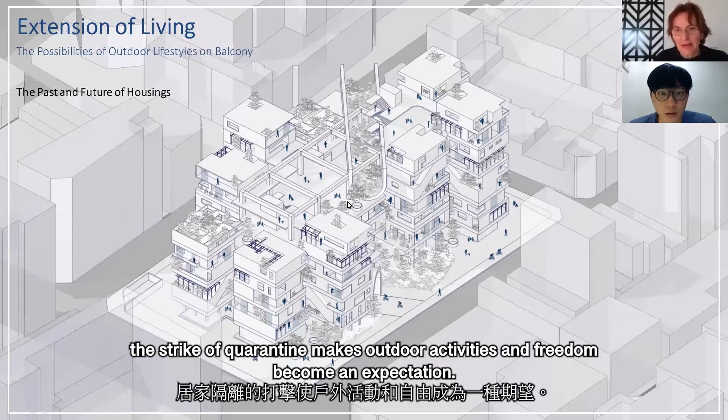What kind of life form is in line with the lifestyle of people? When societies face a dramatic change in the environment, the strike of quarantines makes outdoor activities and freedom become an expectation.

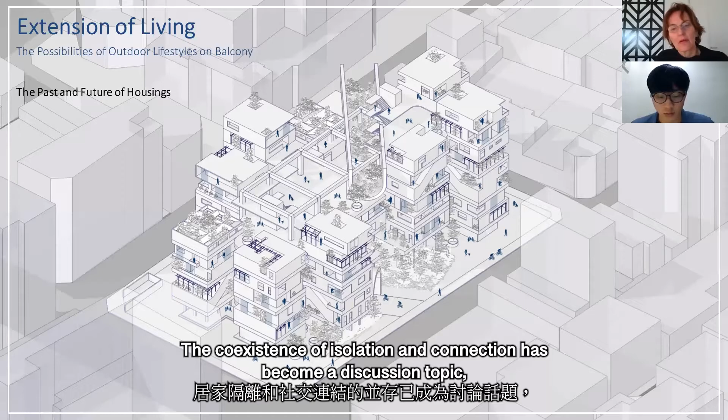The safety and independence of personal spaces are re-examined. The coexistence of isolation and connection has become the discussion topic, and the flexibility and resilience of housing are getting essential. With verticalization and densification of residents, the distance between residents is getting closer. However, the interaction is reduced in comparison.

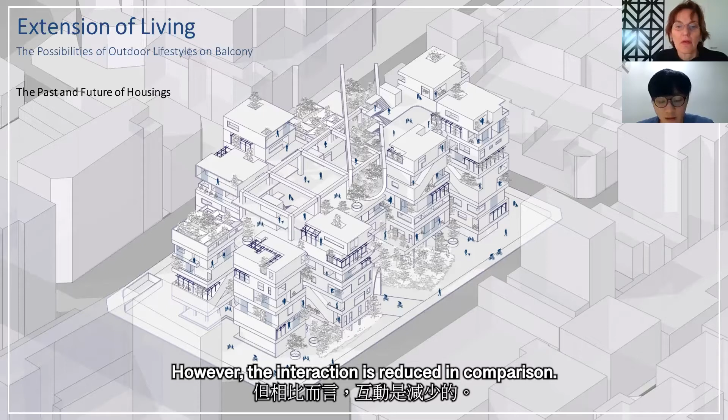The outdoor space that used to belong to humans is ignored. In the subtropical climate, there is plenty of sunshine and high temperature, and rainy weather. Therefore, semi-outdoor space can provide more shelter and a good environment for use.

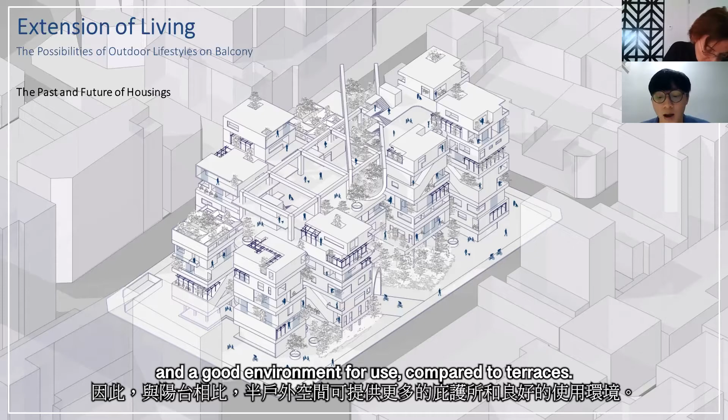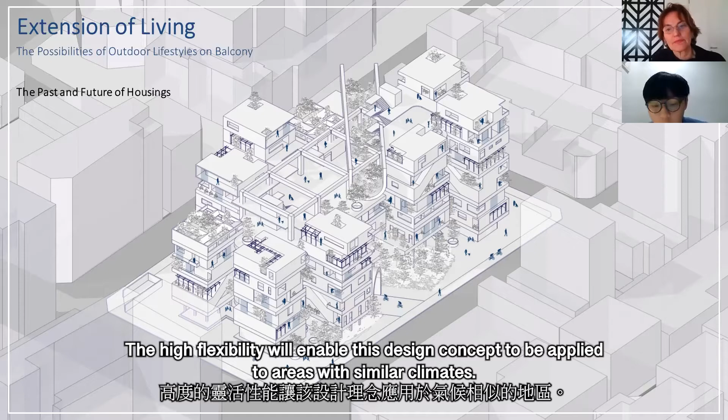The high flexibility will enable this design concept to be applied to areas with similar climates. Under the same system, the building can be adjusted according to different cultures and habits.

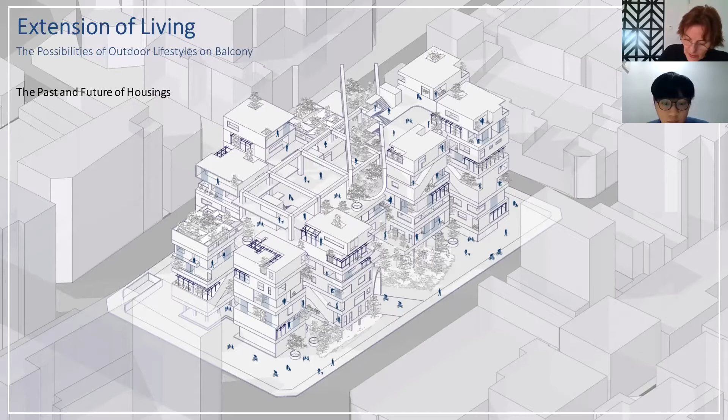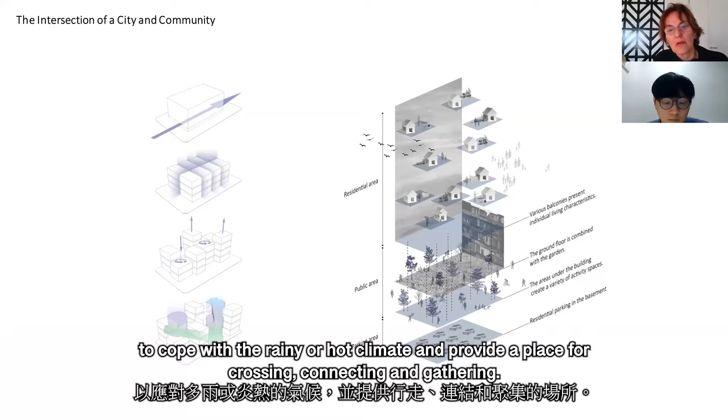The entity of buildings is raised to create enough shelter on the ground level to cope with the rainy or hot climate, and provide a place for crossing, connecting, and gathering. The ground enters the community.

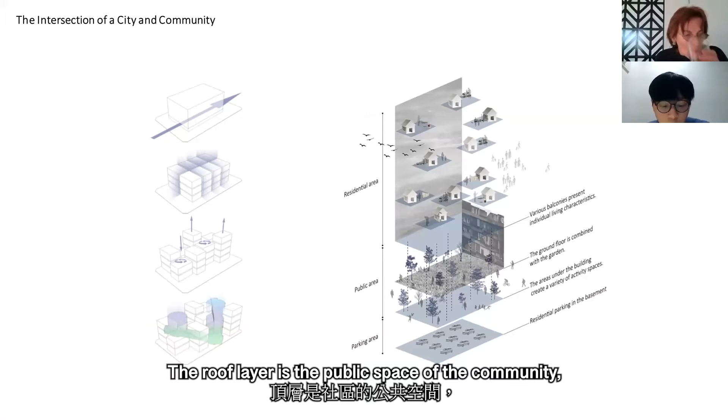The community is no longer a closed field. The roof layer is a public space of the community, providing residents with a variety of outdoor and indoor activities, as well as an interactive area.

Even in a state of cutting off from the outside world, the resident can still enjoy a safe public space.

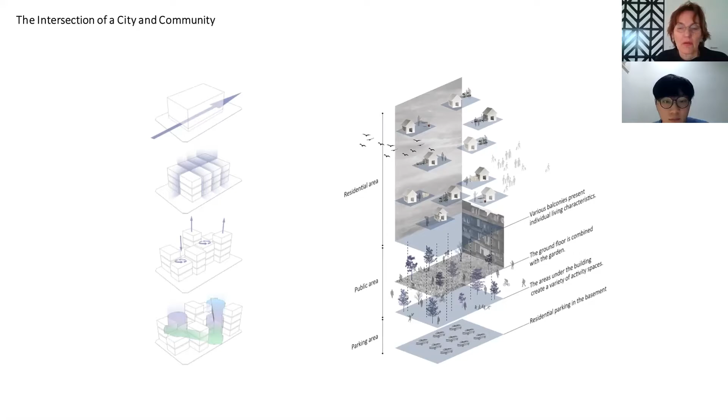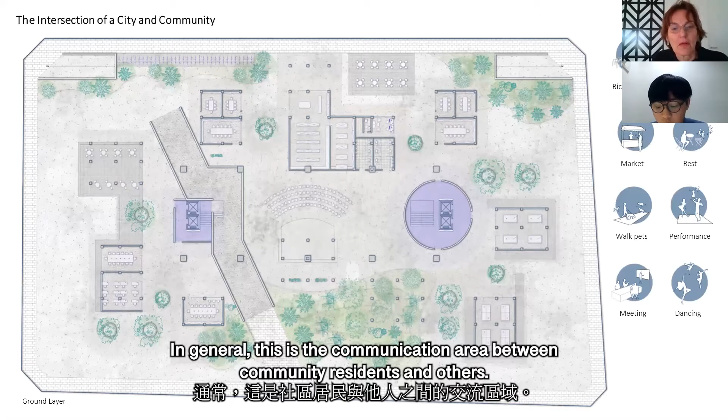The public room units are located on the ground level without a wall of the community. In general, it is a communication area between community residents and others.

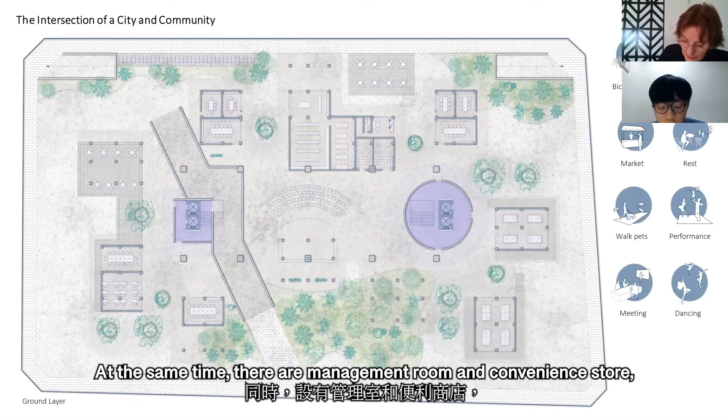At the same time, there are management rooms and convenience store stations, during a temporary period, as a way to filter community residents and people who are not living here.

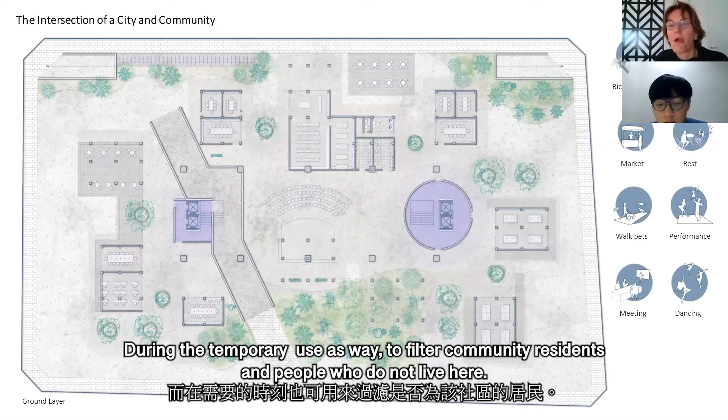Let's move on to the dynamic boundary. Inside and outside are related ideas.

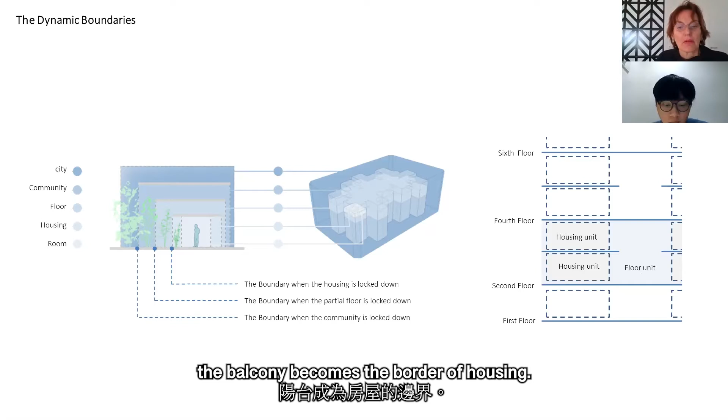When the community is in lockdown, community housing becomes the border of the resident living area. When individual housing is locked down, the balcony becomes the border of housing. In different extents of lockdown, the relation between inside and outside will shift dynamically.

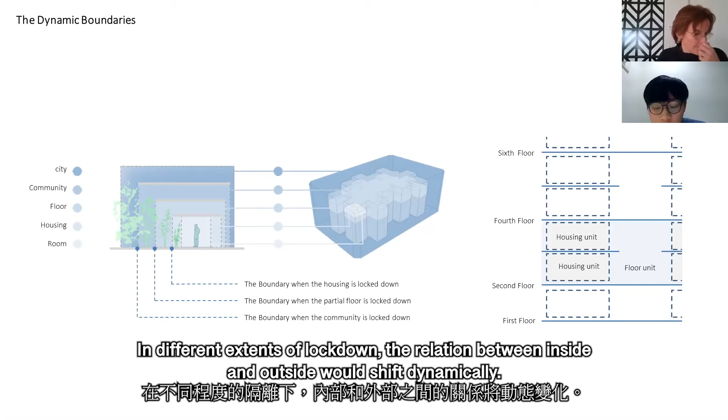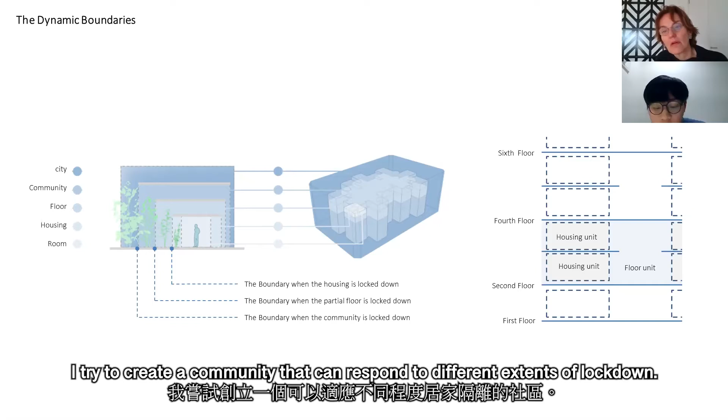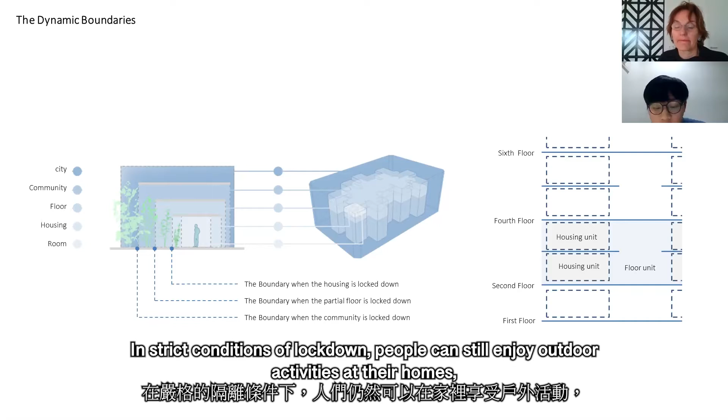In this case, I will define the border from room to environment. I try to create a community that can respond to different extents of lockdown. In strict conditions of lockdown, people can still enjoy an outdoor active living place.

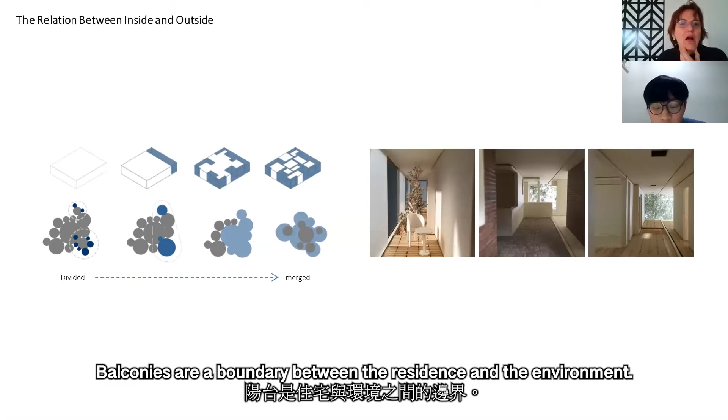Balconies are the boundary between the residence and the environment. It is a transition often ignored. When people have to stay at home longer than before, balconies that are easily overlooked will be emphasized and become the most abundant living place.

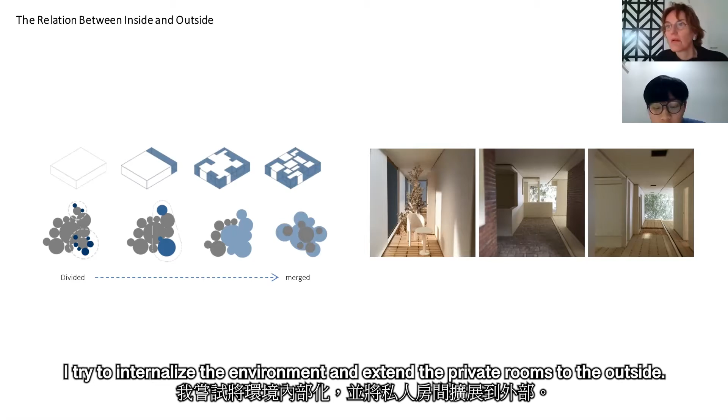I try to internalize the environment and extend the private room to the outside. The coexistence of various life events and environment occurs between inside and outside. Residents can feel the breeze, drizzle, sunshine, and greenery, and this creates more possibility for life.

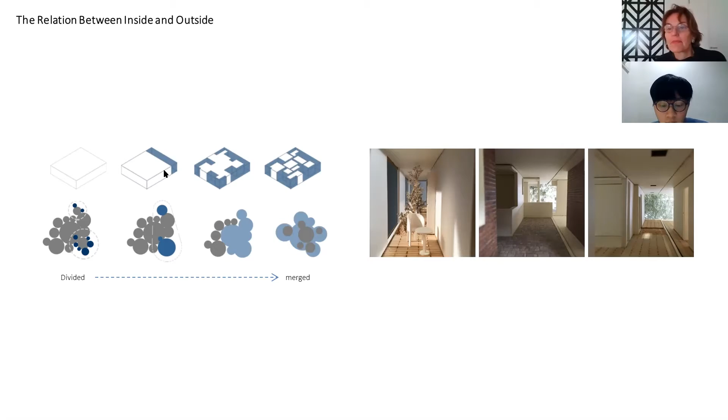Will you be able to imagine how people use semi-outdoor space when the balcony is not just a balcony? Abundant appearances of houses are built by users so that the building will change dynamically like a life.

Essential and basic functions are set in the original plan in order to provide residents an opportunity to alter flexibly in the future. The flexible area is the benefit to change of living concept, increase or decrease of family members, and individual needs. I propose the possibility that all daily events are combined with the outdoors.

Even provide space such as the bathroom, toilet, and dressing room. By using different interfaces, I create a private outdoor environment that allows us to feel the outdoors in our daily life. The original plans will develop into different appearances after resident lifestyle is added.

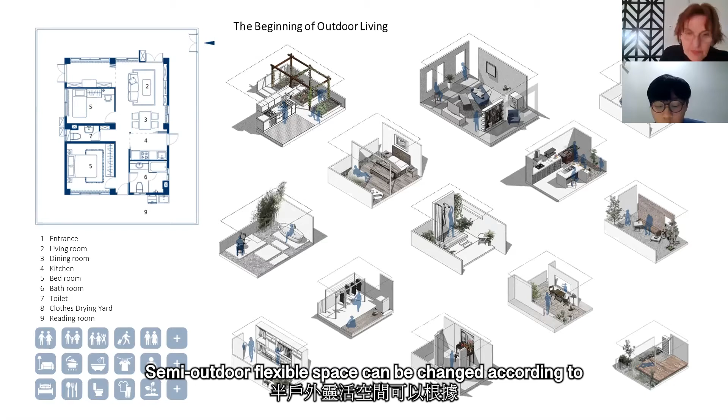Semi-outdoor flexible space can be changed according to different needs or lifestyle of each house owner. I make the balcony like a core.

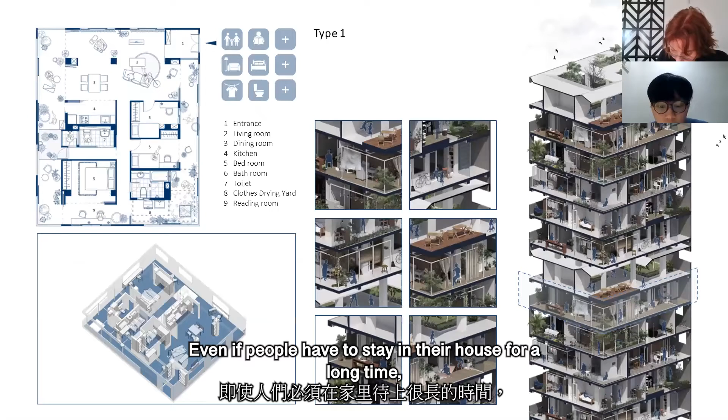I would like to expand on how people live with the outdoor. Even if people have to stay in their home for a long time, their life is still unique and diverse. Based on different settings of residence, I explore the possibilities of living for people, developed into 4 types.

Look at the plan. The slide door and folding door freely allocate the size and openings of each space so that the rooms can be a part of the balcony, and the outdoor becomes a part of the room.

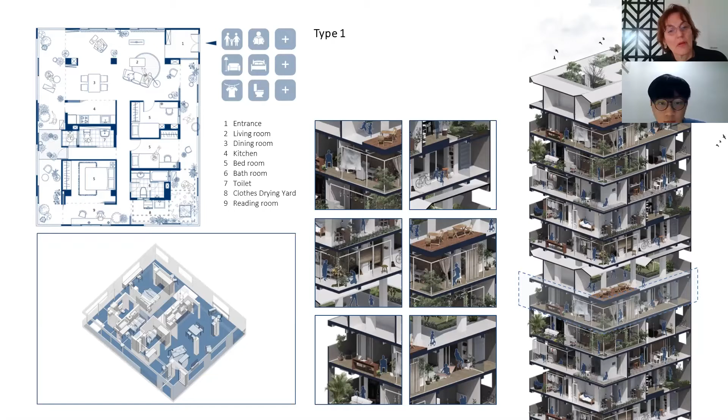Moving on to type 2. People can even create a courtyard at home, laid on the wooden floor garden.

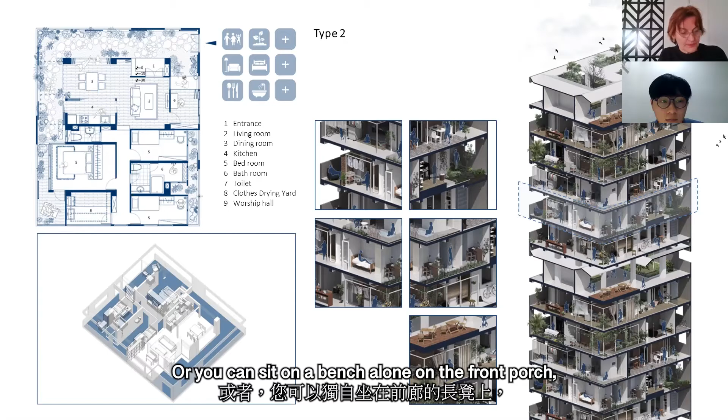You can hear the sounds of breeze and plants by opening the French window next to your bed. Or you can sit on a bench alone on the front porch, reading a book with a cup of coffee, invite friends to have dinner on the balcony, and watch the sunshine fall in the water.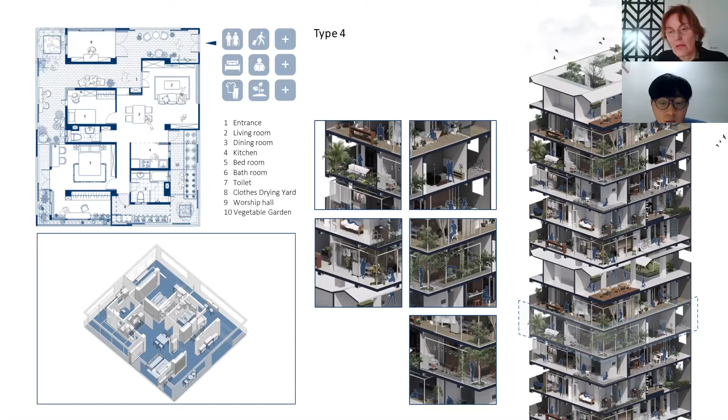There is a window in the corner of the room, facing the trees on the balcony. From the gap in the dressing room, you can see the view of the city. The balcony outside the kitchen becomes a garden for growing vegetables and fruits.

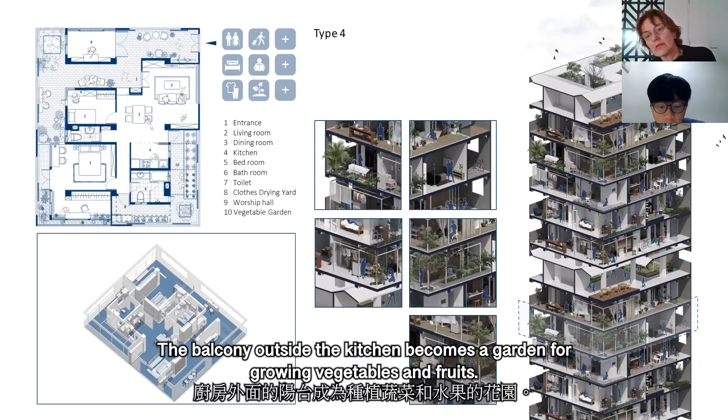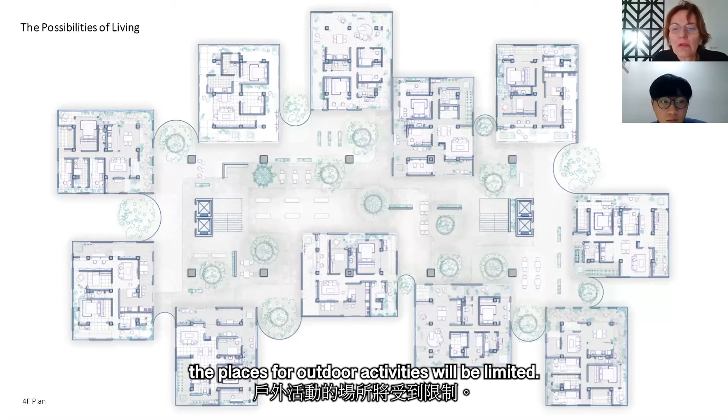This is the plan of the 4th floor. In the picture, it also faces the public area of the floor in his own way. When the pandemic is serious, a place for outdoor activity will be limited. At this time, the public area of the floor can even be used as an extension of

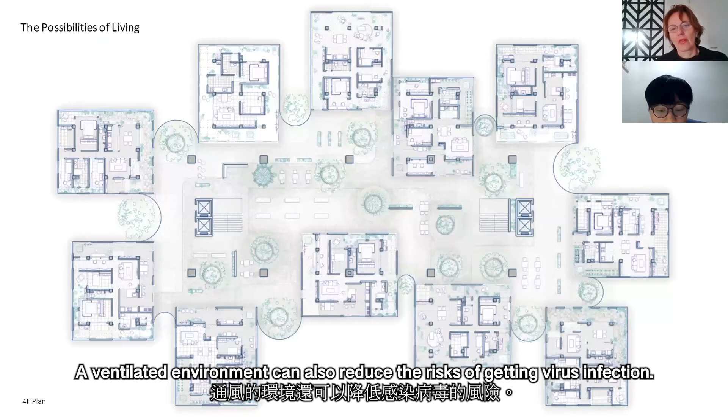the square, street light, and tree, making the floor unique like a village. A ventilated environment can also reduce the risk of getting virus infection.

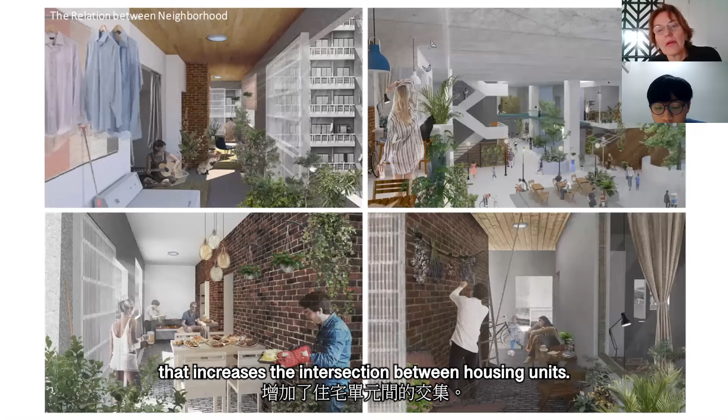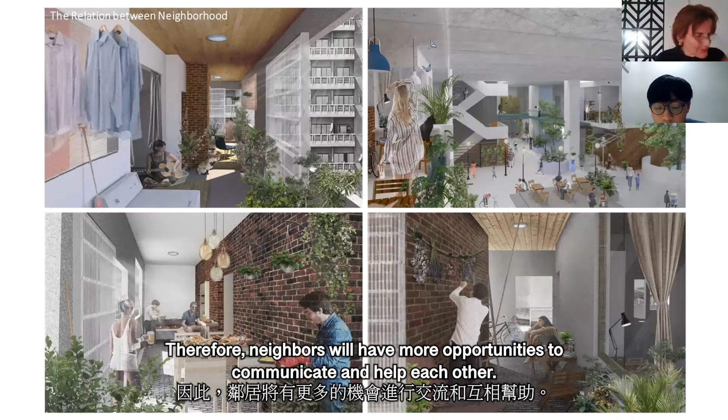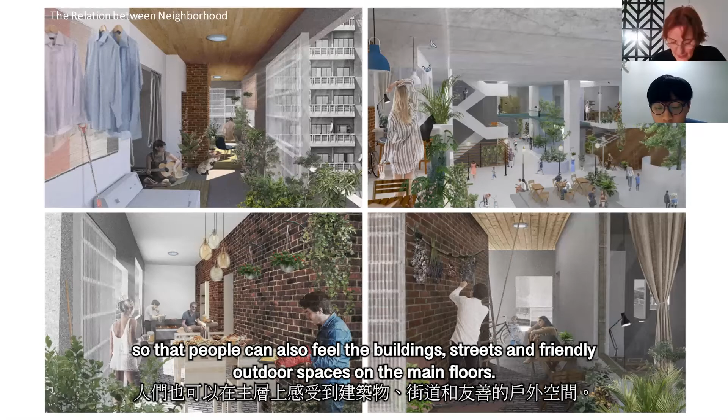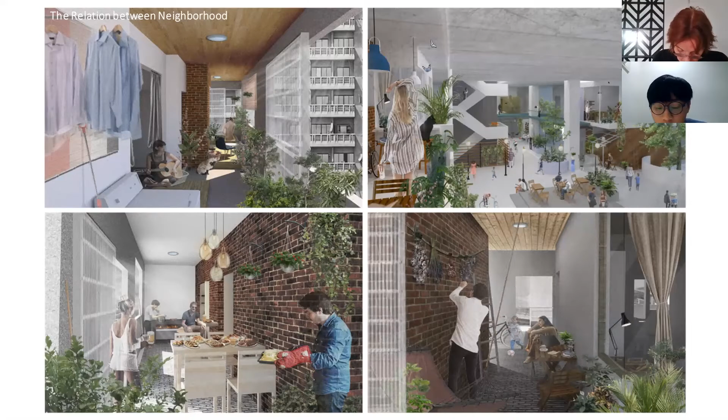So that people can also feel the space on the main floor. The facade consists of wall and translucent partition. The inner wall consists of brick and glass.

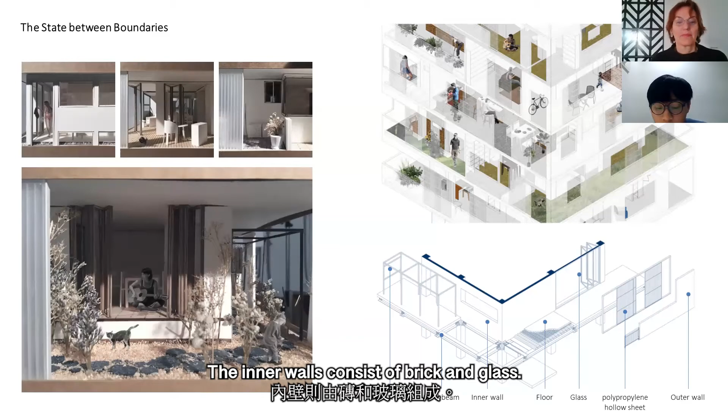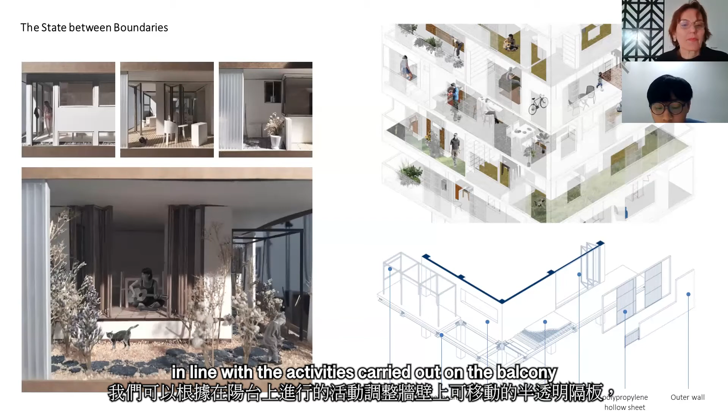However, one of the important reasons for our uncomfortable experience on the balcony is a lack of privacy. A movable translucent partition on the wall can be adjusted in line with the activity carried out by blocking the view from the outside world.

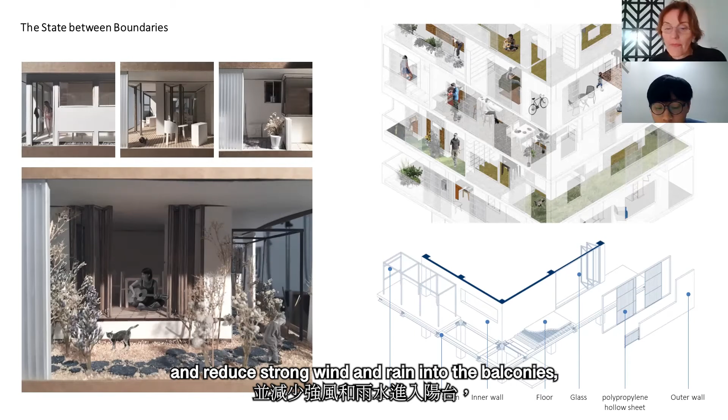At the same time, it can let nature in and reduce strong wind and rain into the balcony, making the space more comfortable and livable.

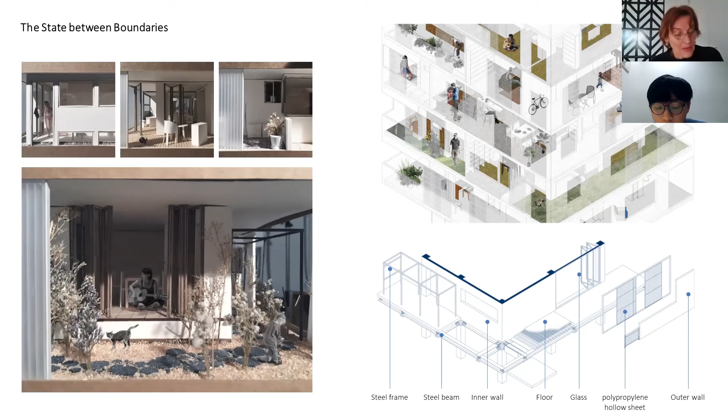The boundary of home is dynamically changing with the constraints of social distance. The semi-outdoor space is regarded as an extension of the home and part of the city, bridging the internal space and external environment.

In the human settlement, the semi-outdoor space of the community and the balcony of the home are related to the city, community, and people. Even when people maintain a social distance, they can feel the cohesion and vitality in the village.

Mental and physical shelter and a place for connection. I firmly believe that its flexibility and resilience allows residents to enjoy a complete and quality life when they face the impact of epidemic and restriction on going out.

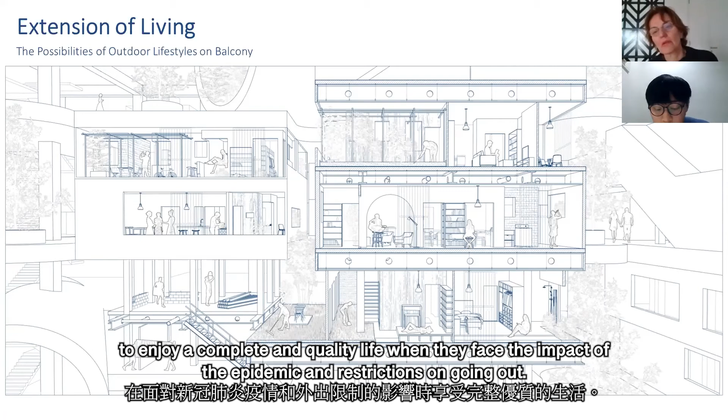Thank you for your attention.

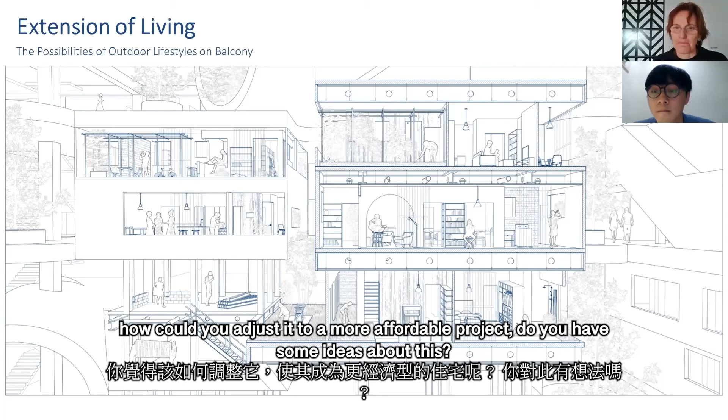And we also, you said it's affordable housing, but we have to say you have, it's very big luxury housing. So how could you adjust it to more affordable, to a more affordable project? Do you have some ideas about this?

At the beginning, I would say it is affordable to everyone, including a new couple. In the original plans, there are a lot of blank areas, so they don't have to use every place of their housing. They can make more room or design more space when they have enough money. So that would be the way that everyone can afford the house.

Okay. And I was wondering if you see this section, but I think it's a very nice drawing. Is your idea also that we don't need air conditioning anymore in the future, that it's much more healthy for people, but also for the climate and the planet?